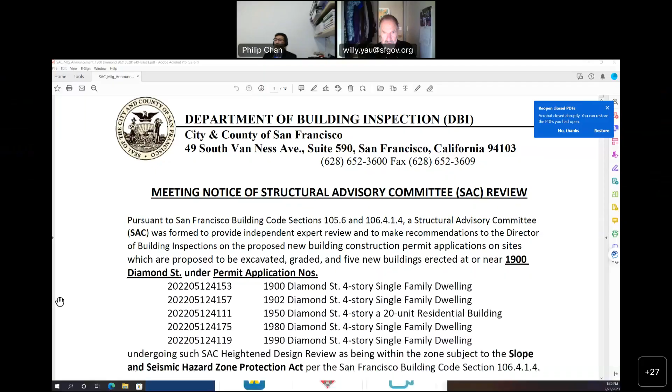SFBC 106A.4.1.4, the proposed project is subject to mandatory submittals and heightened reviews of reports by a structural advisory committee as defined by SFBC 105A.6. The proposed permit applications are proposing site excavation and grading and construction of earth retaining structures and new residential

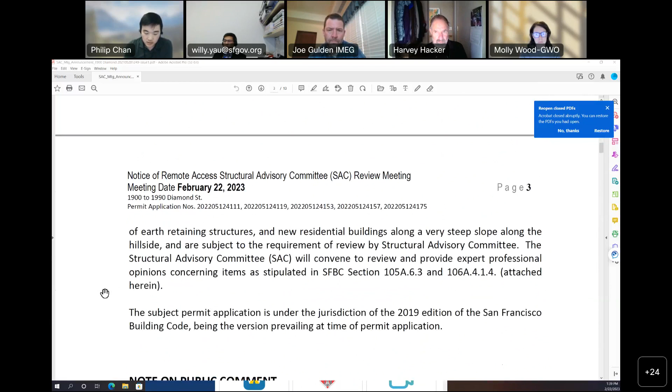buildings along a very steep slope along the hillside and are subject to the requirement of review of the structural advisory committee. The structural advisory committee will convene to review and provide expert professional opinions concerning items stipulated in SFBC section 105A.6.3 and 106A.4.1.4. The subject permit application is under the jurisdiction of the 2019 edition of the San Francisco Building Code,

being the version prevailing at the time.

We'll read the note to public comment. The Structural Advisory Committee will take public comment on all items appearing on the agenda at the time the item is considered by the SAC.

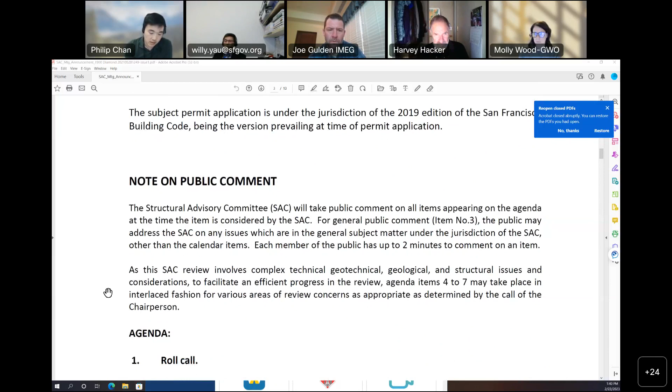For general public comment, item number 3, the public may address the SAC on any issues that are in general subject matter under the jurisdiction of the SAC, other than the calendar items. Each member of the public has up to 2 minutes to comment on an item.

As a SAC review involves complex technical, geotechnical, geological and structural issues and considerations, to facilitate efficient progress in the review, agenda items 4 to 7 may take place in interlaced fashion, or for various areas of review concerns, as appropriate as determined by the call of the chairperson.

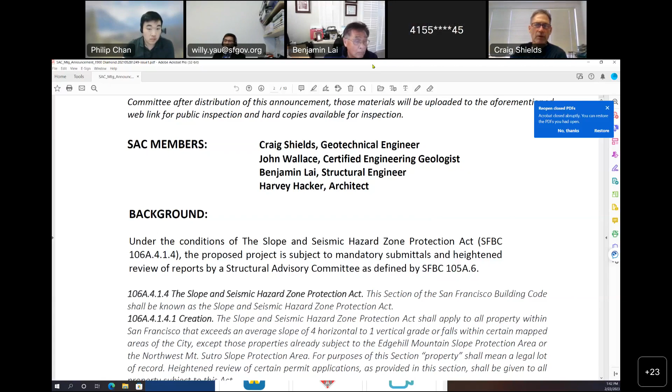John, you unmute yourself. What are you apologizing for? Crumbs? Oh, come on.

We're having trouble. Let's see. John, you calling in? Might be having some difficulty. I saw him on video. He was here earlier. Yeah. Okay. Let's give him a minute.

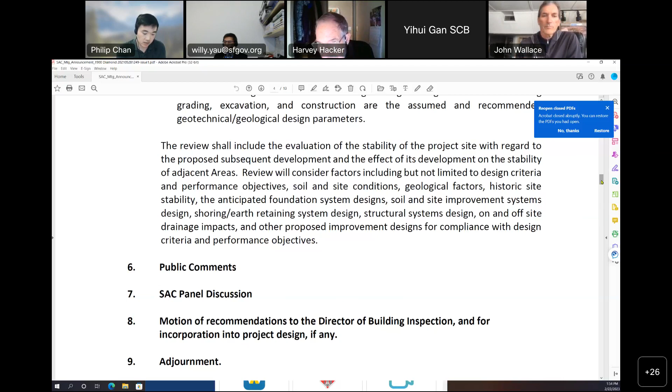Item number 5, we'd like to throw it into the project team's hands and maybe get a quick overview from the architect on the general scope of the project. Then the architect can hand it over, probably going geology, geotech, structural, and shoring in that order. Let your team weigh in on any items in their area of expertise that would help summarize the project for everybody. Along the way, after each respective area of expertise is addressed, there will be action items called out, and those are critical that they get documented in the minutes. So we'll try to be very clear on the action items, things that will require future addressing by the team, and raise those during each area of expertise commentary.

And I guess now would be the best time. I'll go ahead and read into the record the documents that have been provided by the project team for the Structural Advisory Committee review. Let me start. So in my file, I've got a geologic hazard and geotechnical evaluation report prepared by Langan Engineering and Environmental Services, dated July 31st, 2020.

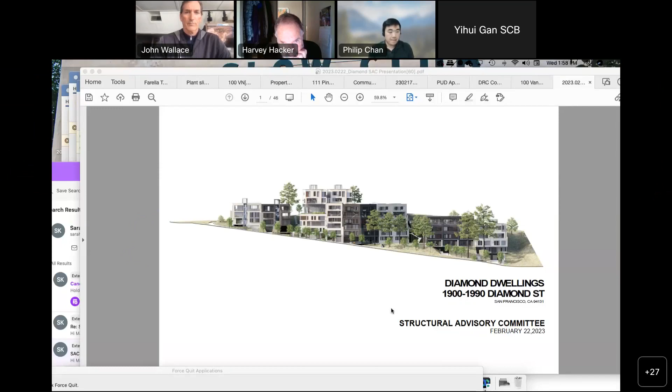So we already did the introductions, but again, these are just the team members: Langan, Geotech and Geological, Irwin and Granite for shoring design, IMEG structural, BKF civil, Groundworks landscape, SED architecture. Civil, landscape, and architecture don't have a presentation part, but they're available to answer any questions and engage in dialogue.

So I think we all know the site now. It's a 3/4 acre site. It has pretty decent slopes in both directions, east-west and north-south, at the corner of Diamond Heights Boulevard and Diamond Street. It's never been developed in its history. Currently it has about 30 trees, mostly Monterey cypress.

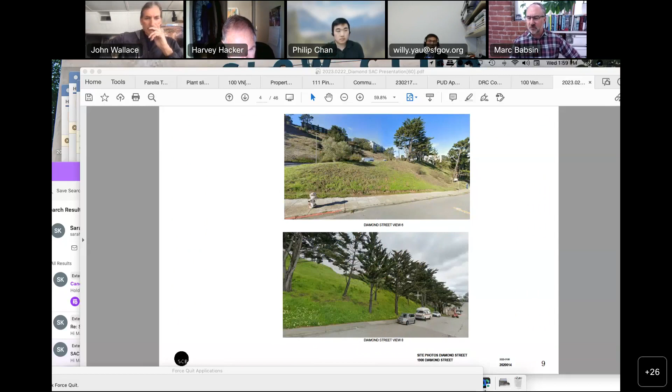Through extensive community engagement, we ended up preserving 10 of the trees. So it's kind of a non-traditional plan. You can see that these duplexes are pushed off of Diamond Street, which makes for a non-traditional development.

But there's a bunch of different building types, as you'll see in a second. I think we call it 5 buildings, maybe 6, that range from all wood, all the way over to the left, single-family homes, to an all-concrete building to the right of that, and then a couple of 4 stories of wood over 1 of concrete. In the back, the 5-story building is 2 stories of wood over 3 of concrete. That's their garage and lobby with townhouses above.

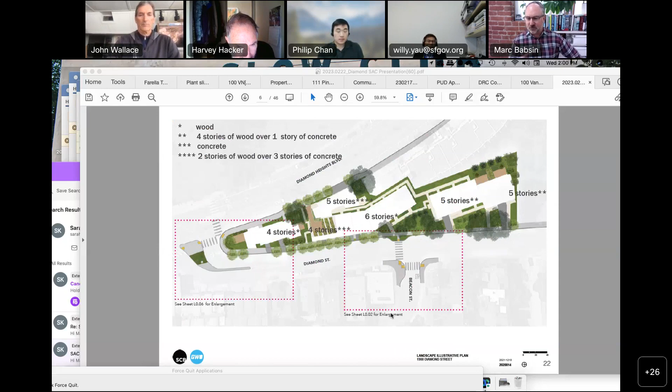Structure, we'll get into this, but this is kind of just again a lay of the land. These are just pictures, so you can have visuals of what it looks like before we get into the technical stuff. This is on the north side of this site.

This is Diamond at 29th. Those are the cypress that exist and will remain. Behind that, over to the right, you see the single-family homes, and then duplexes 7, 8, and 9.

This is kind of midway on Diamond Street where Beacon hits, and you get to see a few things here. Starting on the left, it's duplexes 2 through 6. Above that are the 2 townhomes that are on top of the garage, where you can actually see one of them there. And then on the right, after the green break, is duplex 7, 8, and 9.

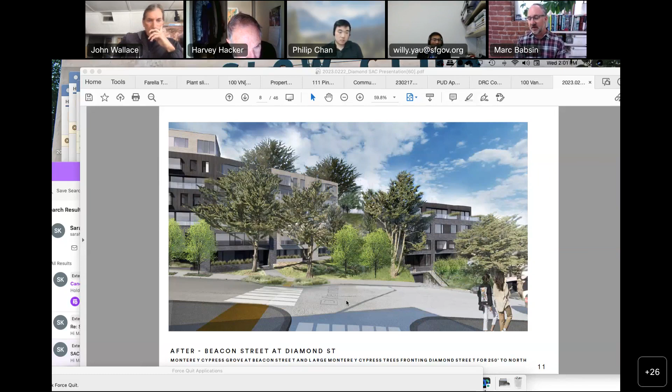This is still on Diamond Street. This is duplexes 1, 2, 3. You see a little bit of 4 and 5 off to the right, and looming above that is the top of the garage building, the top duplex there. We've got a public stairway on the left there, and you can even see people above the 4th floor. That's a public deck.

And then when you're up on Diamond Heights Boulevard, it's much smaller. Starting from the left or the north, you've got that garage building with a garage structure and then 2 units above. You also have your lobby there. Then a break where the stairwell is, and then 2 single-family homes. And then it's someone's yard on the right.

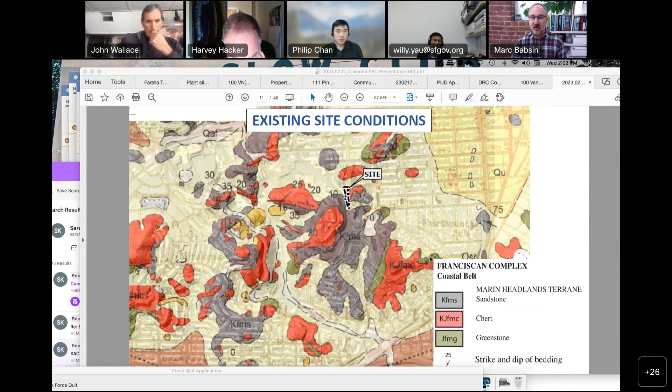All right, well greetings, I am Josh Goodman. Just as a reminder, I am a senior project geologist with Langan. I'm a certified engineering geologist as well as a professional geologist in California. Just to give you the overview or the roadmap of where I'll go with my part of this topic, I'm going to start by giving some contextual information.

So I'll share what we were able to glean from the surface, from public literature. Then we'll look at the subsurface. I'll summarize the subsurface information, and then I will loop back and discuss some of the slope stability settings.

So what we're looking at here is a published regional map by Schlocker. Our site here is in this sea of what he's mapped as ravine deposits, the superficial units. You can see that it's surrounded by bedrock of the Franciscan complex, including sandstone, chert and shale. I'll also point out there's some greenstone mapped nearby, and I'll come back to that when we talk about some of the subsurface data that we collected.

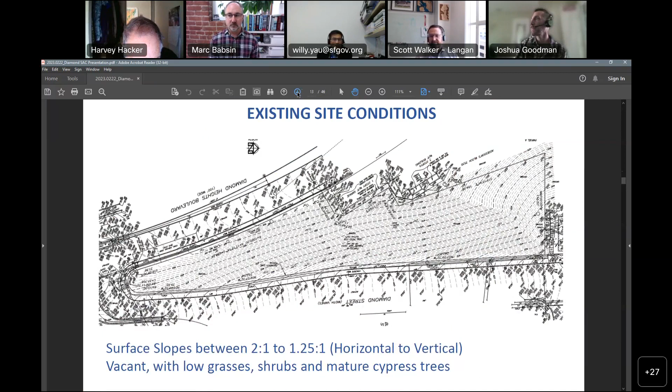Here's our site plan. Our subsurface exploration program consisted of looking at 2 main types of data. One comes from test pits, shown by the black and white checkers. We've got what we're calling trenches down here, excavations about 3 to 4 feet deep, made for some of the landscaping that was done. We went in and logged those as well. And then, through our subcontractor, we collected 2 seismic refraction profiles, shown as A and B here.

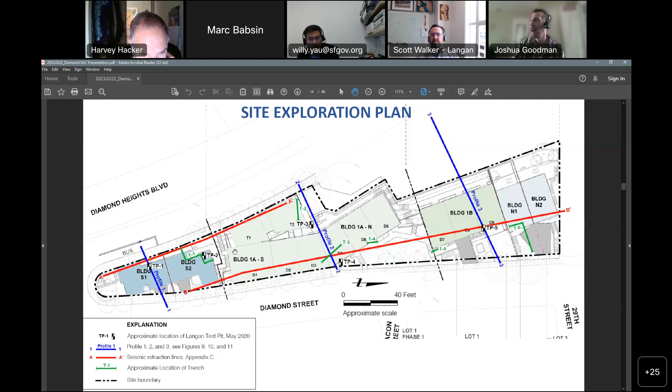What I'd like to do now is just at a very high level share some of the findings from the subsurface information. We'll look at this cross-section profile 2 and profile 3, which go through the highest slopes on the site. And then we'll come back and look at the seismic refraction data.

This is just an example of our test pit log here, with 2 feet for scale. In contrast to what I was showing you with that Schlocker map, the regional map, with one exception—our test pit at the south end—everything else was essentially all in bedrock with a thin veneer of topsoil. Our southernmost test pit, we did find about 18 inches to 2 feet of what looked like a surficial deposit that could be consistent with colluvium or those ravine deposits by Schlocker.

But again, we are mostly in bedrock, and the rock we were able to identify included chert, shale, and sandstone. This is a key point with respect to slope stability: both the bedding as well as some of the joints or fractures consistently dip into the slope. Here's a representative photo of what we were finding in our test pits—you can see this blocky bedrock material, this is the spoils pile here, and you can see these lines or stripes crossing the excavation. That's the stratigraphic layering, and it's inclined into the slope.

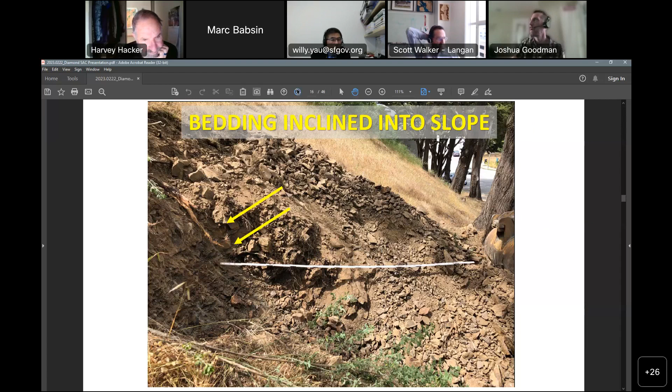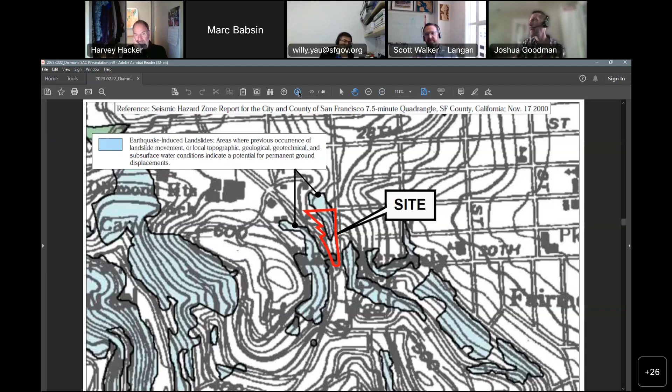Regarding the geological conditions, it's possible that based on the Schlocker map there were surficial deposits, but while we didn't encounter them, or only encountered them in a very limited spot, it's likely that if those things were there, they may have been removed during grading of Diamond Street or Diamond Heights Boulevard. But in general, we don't have those conditions here, and again, shallow bedrock.

North of our site, there was a series of slope failures that impacted some of the nearby properties, associated with the Vista Del Monte apartment buildings. Reading and reviewing the reports, our conclusion was that yes, these landslides occurred near the site, but the conditions that led to those landslides were very different from the bedrock we had at our site.

Specifically, they documented between about 10 to 17 feet of fill soils over a claystone bedrock, and the conclusion was that the failures were happening along that interface of rock and soil, which we don't have. There was also a natural spring present, but no groundwater was encountered at our site during our investigations. There were also other anthropogenic factors that may have contributed, including the presence of a retaining wall and other water conveyance features.

So that is all I have, and I will now pass the baton on to my colleague, Scott Walker.

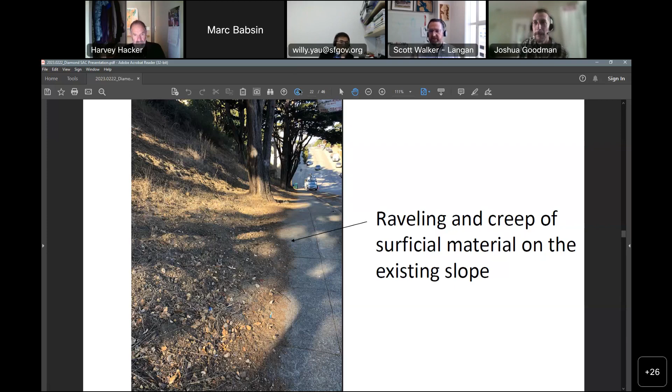Again, I'm Scott Walker with Langan, a geotechnical engineer in the state of California. We've worked on this project in conjunction with Richard Rogers, who has a lot more experience than I do, which is a great resource to have.

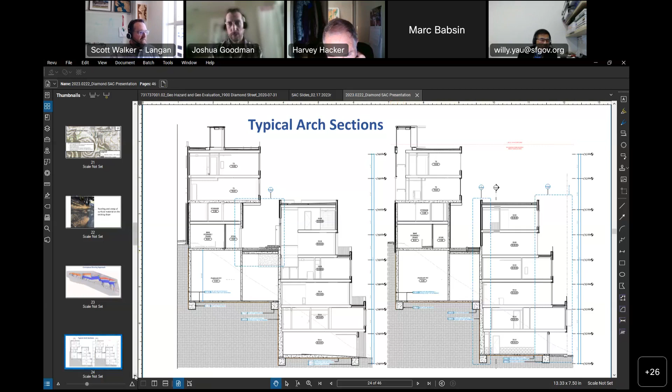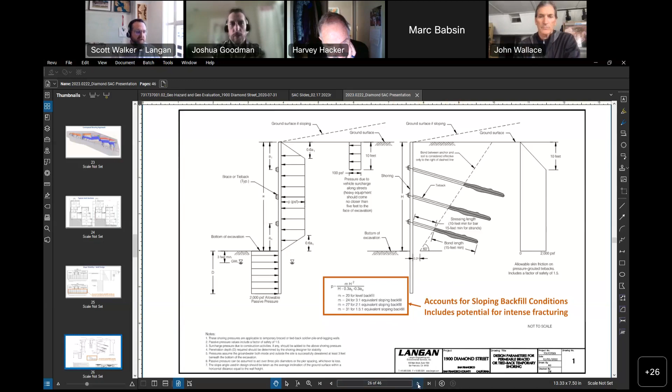The document that this figure is from was actually a supplemental document as well. It was not listed, John, in your list. I'm not sure if you guys have it. If you don't, we certainly can provide it, and that can be a comment we close by providing. We believe it was included in the package that was sent. Yeah, I haven't seen this particular one. Okay, thank you for that clarification. Yeah, I think it's in the slopes or shoring letter. We had two supplemental letters, right? One was micropiles and one was shoring. That's correct, those are the two.

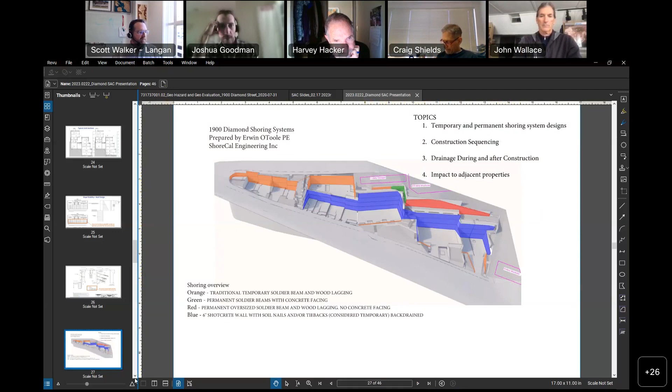And here we're coming back to this 3D view just to get an overall approach to the various shoring. Erwin O'Toole is going to pick it up from here and talk in detail about the various shoring activities. But again, we can see we do have some of the improvements. So the buildings that are nearby, we have the one-story garages, 2 to 3 story structures that are kind of embedded into the hill slope a little bit, and then a 4-story structure down here on these sides. All 3 of these are supported by the various shoring systems as planned. I think, Erwin, I'm going to pass it on to you.

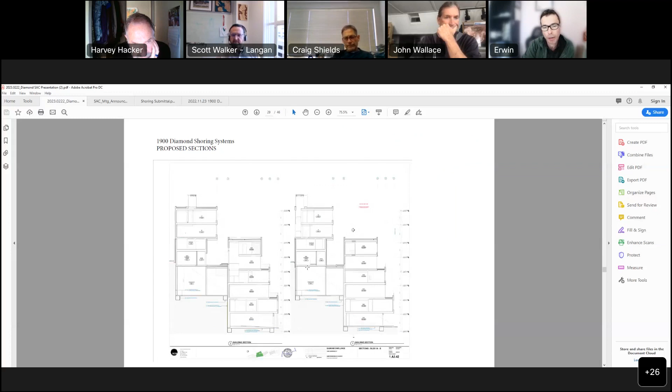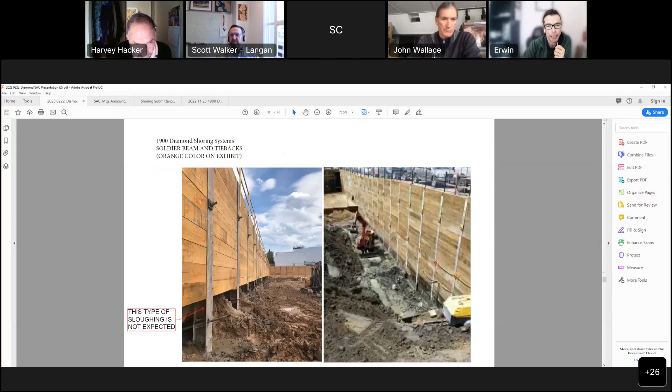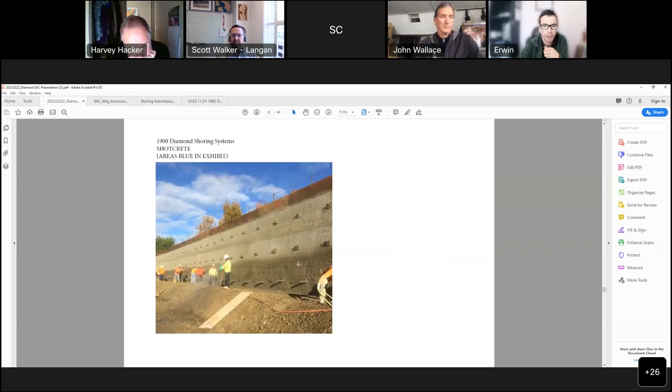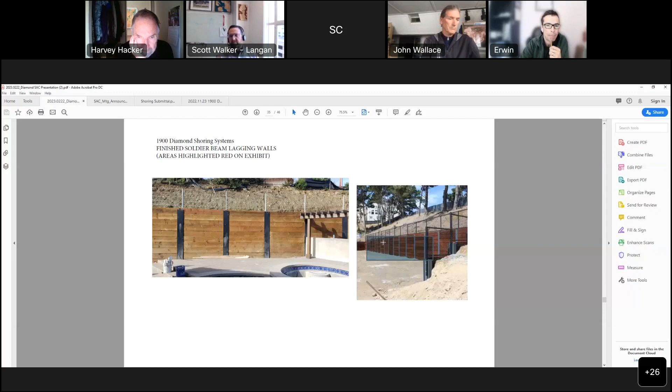And in green, we have the area where we have soldier beams and then a shotcrete facing.

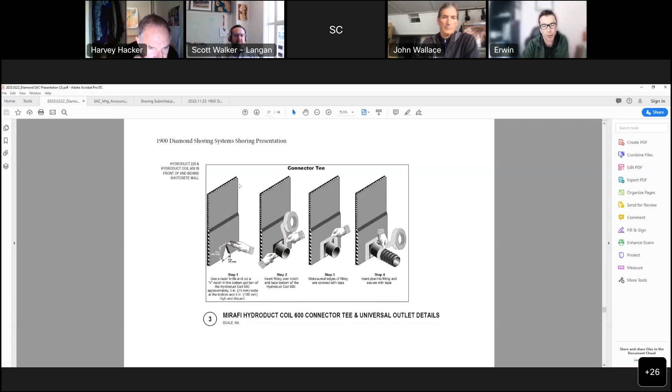Next, we're looking at some of the traditional drainage techniques for the temporary condition behind the walls. This mirafi-type product actually gets put in place in two locations: one, behind the shotcrete lagging or the shotcrete soil nail wall, and also, as part of the waterproofing system, in front of it to ensure adequate drainage. That location is here, and where there's shotcrete, it's here and here.

One of the items that I take on board is the temporary and permanent shoring design, which uses the geotechnical parameters reviewed by the team, and the construction sequencing, which I should speak to a little because I'm not sure how well this will present, but it's a 6-page document within the 16-page shoring plan.

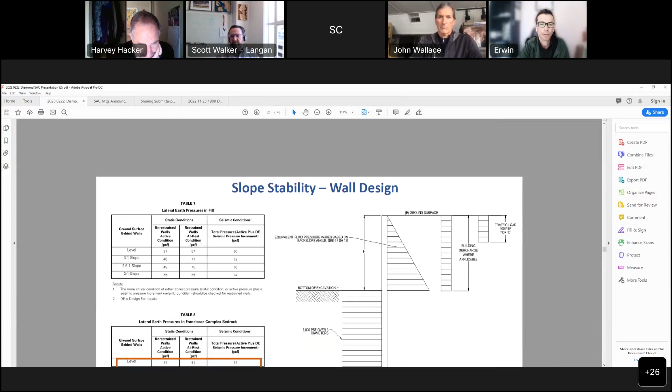What it tries to do is show the team each stage of how we build the project from the top. A better way to present this is to go back to this image right here and just talk through it. It's presented in the construction document.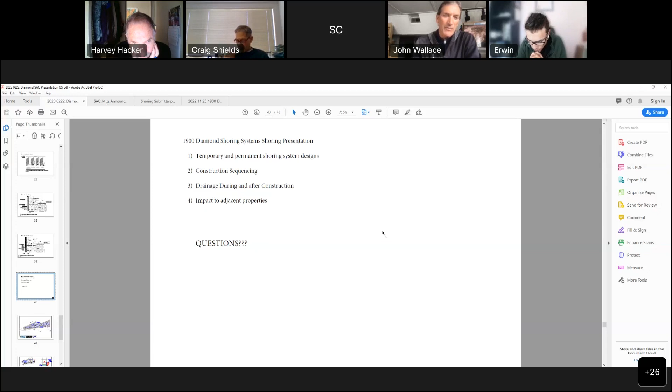And I tried to access the portal for the documents several times and wasn't allowed to re-access it. So that's why I was wondering if there were other documents out there that had been updated since the ones we received initially. I'm wondering if this is going to lead to a lot of your questions and comments being on an earlier version. That was not a complete set that it sounds like you reviewed. Is that true for the other groups or just for shoring?

Craig and Ben probably spend a lot more time on the shoring than I do, but I certainly had a lot of questions because the couple of things Erwin presented were things I had questions on, for sure on back drainage, because none of that was illustrated on the first set.

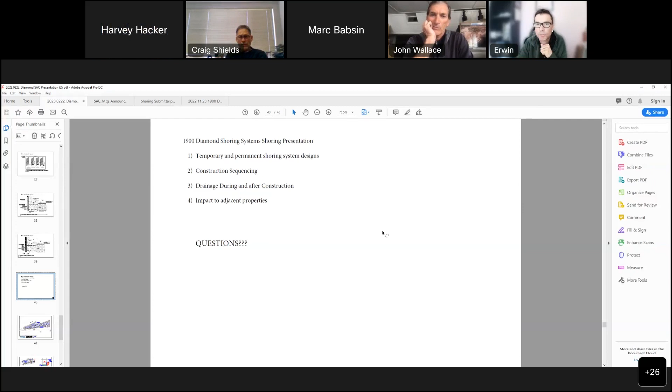Trying to make the most of this time with all the notice. Maybe everyone could stop the share so we can see each other for a second. Erwin, are you able to walk everyone through your plans? Yes. Does that make sense, or do we just stop this meeting and reschedule it for a month from now? It's okay, thanks for calling, Wilson.

I think walking through the plans would be good for now. What do you think, John? Maybe finish the presentation, and then when we go through each respective area of expertise more closely, we can dive into the nuts and bolts and start with our questions on the shoring, and Erwin can walk us through it at that time.

I think what the process was supposed to be was we gave you a progress set to do the bidding, and then there was supposed to be a review based on the final set. But sounds like something was lost in transition there. So rest assured the drawings were completed, but I think that sounds like a good approach, John.

I think we just have IMEG left. Did you have anything else, Erwin, from your presentation? No, thank you. Okay.

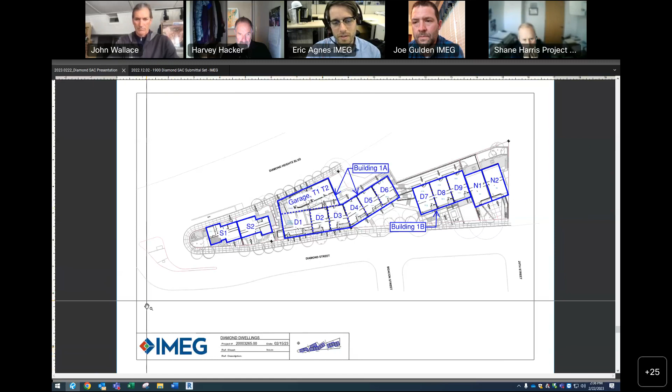So starting off here with S1 and S2, we have a cantilevered retaining wall structure for this building. It's very common within the residential industry, especially where you have wood frame structures that aren't able to support your retaining wall, so you have to typically design it as a cantilevered retaining wall. This means the foundation alone is resisting that overturning force from the retaining wall itself.

We can see here that in section 1, we'll start off with just our loading. We got our typical triangle distributed retaining earth load. At this location, we also do have a traffic surcharge because we have the street that is close enough to impose that load, and then we also have our seismic loads as well.

So all 3 of these interact to create sliding force. Now, how that force is resisted is two ways for this building. We have our friction force, which is the interaction between the bottom face of the footing and the soil itself - that friction can resist the movement. And then you also have the passive pressure, which is the vertical face of the footing being pushed against the soil itself.

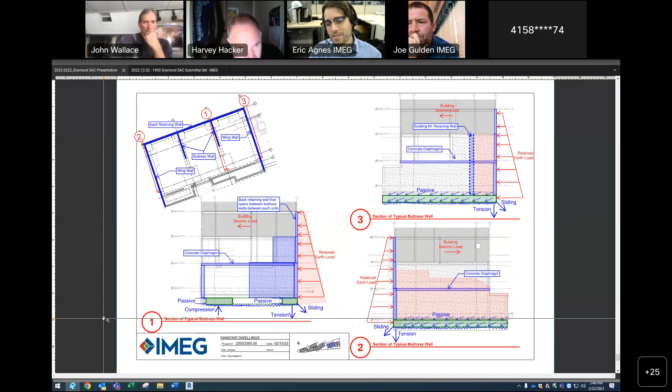Moving on, we have building 1B. This is a very similar structure to what we saw before, just slightly smaller. We again have the same buttress and wing wall system and back retaining wall system. We're utilizing the same methods as far as sliding is concerned: passive pressure, the coefficient of friction, and tie downs at this location. Again there's the same TC couple as before.

That's the design. We could take a look at the wing wall for this. It's slightly different; we do have one level of concrete, which allows the wing walls to span vertically and cantilever past that diaphragm to catch that little bit of soil above. As far as sliding is concerned for the wing walls, we're again utilizing passive pressure.

Section 3 shows the wing wall on the right-hand side of the building. This wing wall isn't taking a lot of load because we have an adjacent structure next to it, building N1. This red section you see is the only soil that's pushed up against this wing wall, so we're seeing pretty light loads there.

Moving on to N1 and N2. Again, it's very similar to what we saw before. We have the typical buttress wall and wing wall system and the back wall. One thing to note, this is just a buttress wall on this side, not a wing wall, because there's the unit D9 there, so there's no soil pushed up against it. It's just used to transfer load from the back retaining wall to the buttress wall.

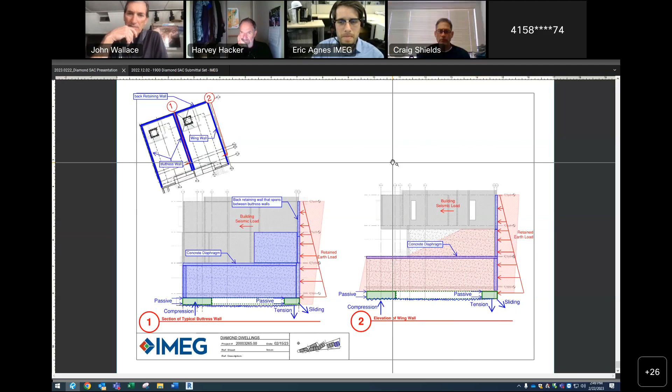Am I the only one that didn't? Ben or Craig, did you guys have any updated? No, I just got the ones that I got originally. I didn't see any emails with new drawings attached.

I went back through the emails. They were there. Everyone was on them, right? December 2nd, 3rd, 4th - all this discussion about the new drawings being completed, and Tom sent another link. We all were on there. It's kind of upsetting.

Sent to Willie on December 5th, and everybody is on there saying that they're available through the Dropbox link, announcing that the new drawings are ready the next day. I wish if people hadn't been able to access them, they would have notified us. That's disturbing.

So Marc, you're saying that they were made available to everybody? Yeah, we're all on the emails. December 5th, Tom sent one to Willie saying what files they were in, and they were available through the Dropbox link originally provided. There's an email with the Dropbox link from Willie on December 5th, and then there's some requests for updated calculations from shoring from Benjamin on the 5th, and then Willie asked me, and we provided a link.

There's an email from Willie talking about how we're going to submit on the 2nd. I mean, lots of dialogue about it. You guys reviewed what you reviewed, but it's disappointing.

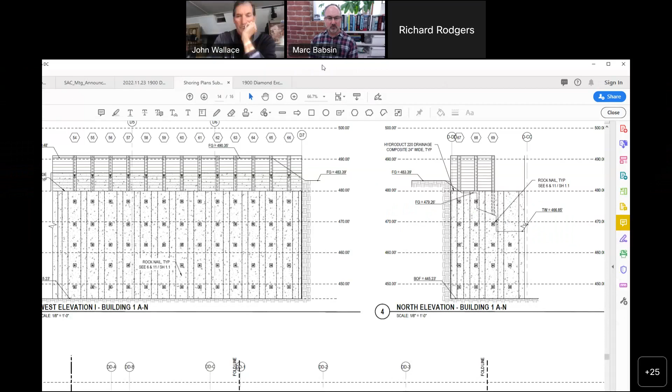And I guess if you call out your elevation on the rock bolting, then everybody knows it's 5 feet or 6 feet or 10 feet, whatever, right? But since you didn't call anything out, nobody knows exactly what the spacing is between the rock nails. Happy to elaborate on that. Typically, when we record these, we record them at the elevation and the location.

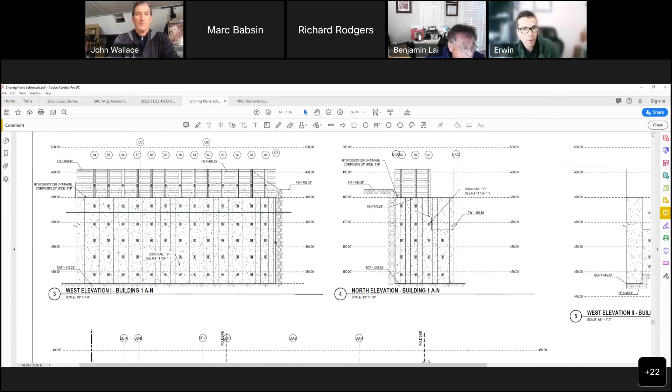So, for instance, on this elevation here, which is one of the principal elevations, what we have is the drainage panel shown there. And then these would be installed per the notes at that elevation, which is less than 6 feet. What I wanted to do with these was try to give a little bit of flexibility, so we have a callout here that shows the maximum and minimum for this work. Let me just look through these 16 pages and get it to you.

So this was the updated set that calls out those maximum and minimum. You say this is again 8 feet on center max? Beg your pardon? On the vertical dimension, if we go down to the second nail and the third nail, there is an 8 foot on center max, isn't it? Right.

Yeah, for instance, to speak specifically to the question about excavation and exposures, I chose this 3 foot max for the top, so that typically these are installed 2 feet below. So that would put us at a 5 foot exposure of dirt. And then once the nails go in, this shotcrete can get brought down more, and we can move on to the next elevation, so we can have intermediate shotcrete pours as necessary.

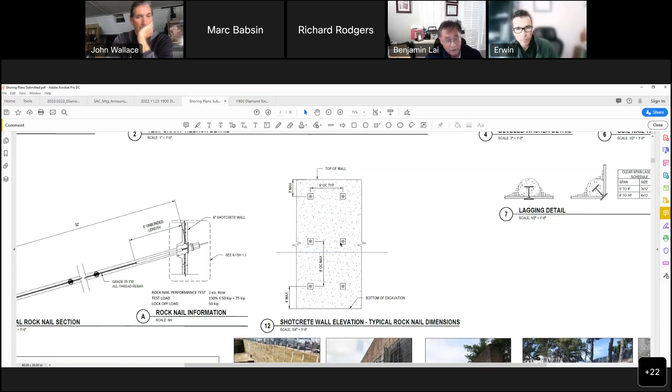Well, it's still 8 feet though, right? So you get 2 feet below the nail and then you shotcrete to whatever you excavate, the 2 feet below the nail, then your next layer gets another 8 feet max. Correct, but you can have intermediate makeup pours as necessary.

But that didn't call out your nail installation, that kind of thing. I don't know, maybe you should add that to it so that the people doing it, or the inspector doing it, know that's going to happen. Yep, absolutely.

Yeah, also on your calculation page, you show the input that shows your elevation, or so it only shows like 4.6 feet per each layer. But I don't know how this would relate to your drawing, how you get that back to your drawing saying this is 8 feet on center. How you design that compared to what you design in the calculation doesn't really match on your drawing.

Because on your calculation page, like 256 of 259, that page, it seems like you have 8 rows of nails, so every layer is a 4.6 feet difference in the spacing. But then now on your drawing, you say 8 feet max, and I don't know, adding everything up, how you match your calculation.

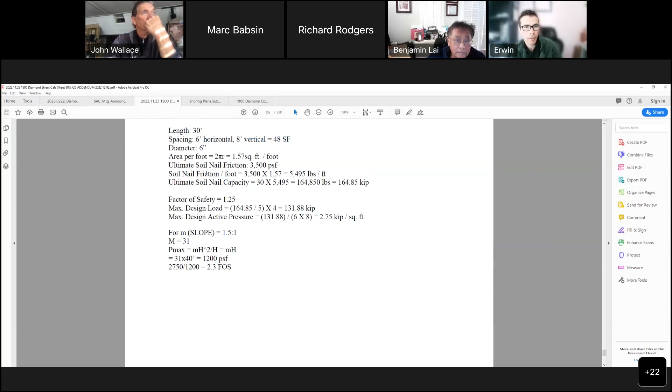I have the updated calculations here on this 259 page document, and this is the spacing there at 8 foot, 6 foot horizontal. We can go through this now or later, but the calculations match.

This elevation, this page, you see like 1, 2, 3, 4, 5 nails in here, right? Correct, yeah, for a 50 foot cut. Then you go to the next page, 256, your page 253, then page 256, a couple pages lower, then you write those numbers there. Your first row is 4 feet and the second is 4 foot 6.

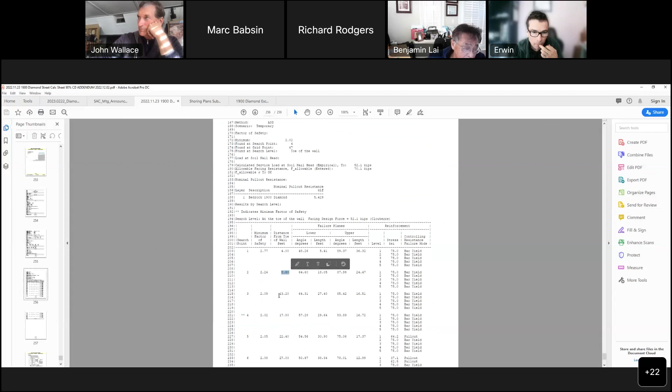And the third, you add another 4, 6, and so on and so forth. Keep going, you have 8 rows of nails in here, seems like to me. But then how can you say 8 foot maximum? I'm not quite understanding how you get to that.

Understood. We've... maybe you addressed those. Modify your calculation or something to match your drawing.

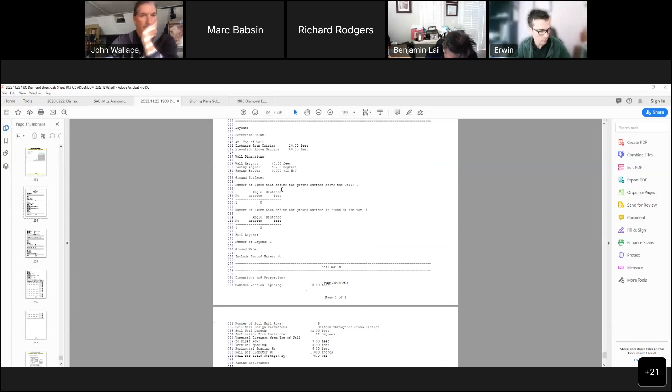Yep, we can update that.

Also, on your cantilever soldier beam design, on beam 121 to 139, I found it a little weird. Your beam 121 to 125, design height is 16 feet, 6 feet on center, you need an embedment of 10 and a half feet.

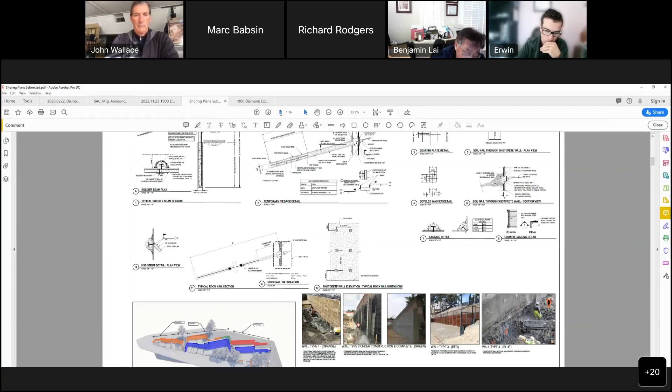But for 129 to 134, your retaining height is 20 feet, same 6 feet on center, you require 9 foot embedment, which is less than 16 feet. And also for 135 to 139, you have a 27 feet retaining height cantilever beam at 6 feet on center, you only need 15.5 feet embedment.

Doesn't seem really right on the geometry because you're 27 feet high, then you have like half of the retaining height as embedment for the soldier beam. I guess you might want to double check your calculation, because for 16 feet and 20 feet, your embedment would be worse.

Not sure which location we're talking about here. Well, that's on page 17 of your calculation, your chart. Your beam 121 through 125, you have a 16 feet retaining height, and then you need 10-foot-6 embedment.

121 to 125, yeah, right here, 10-foot-6, right there. But then the 129 to 134, you need 9-foot embedment, which is a 20-foot retaining height. How can that be? Seems like that doesn't really make much sense.

Oh, thanks for that. And also the one below, 135 to 137, 139, you have a 27-foot retaining height, and you get 15.5 feet embedment. It doesn't really seem right on the geometry—27 feet high, that high, then the embedment so shallow.

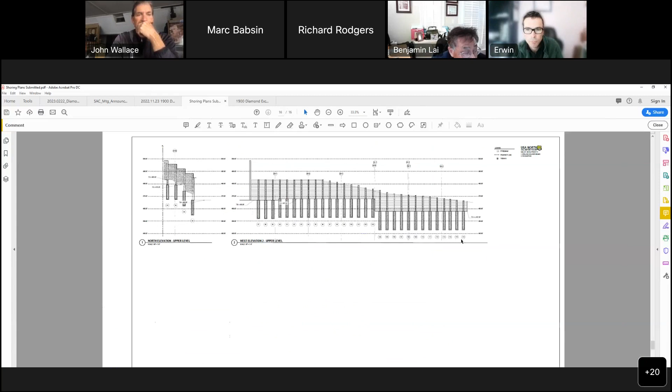I guess you want to double check that, because normally you want at least a 1-to-1, or 1.1 to 1.2, embedment ratio for the soldier beam, for the cantilever.

Yeah, we're gonna get back to you on that one. Yeah, you want to double check on that.

And also in your calculation of the soldier beam, you allow for 3 times the geopier diameter for the passive resistance. Your geopier is 2.2 feet diameter, and you use 3 times. But because you're only 6 feet on center, you probably cannot use 3 times on that passive. No, it still reduces to only a 6-foot spacing anyway.

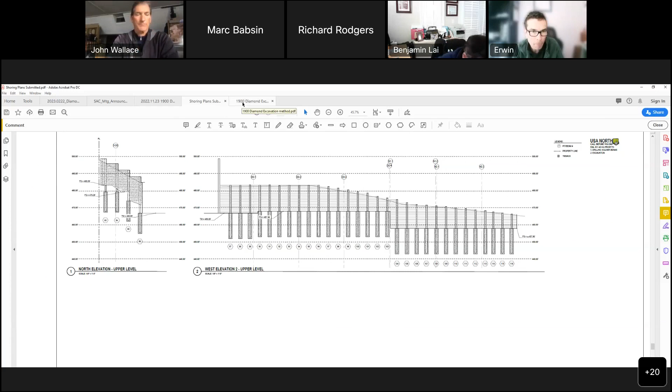I guess that's one major part of my comment, and I think you probably need to double check your calculation, and do some more work on the elevation so that you show all the rock nail numbers and the layers, what the row elevation is, so that people know what needs to be done over there.

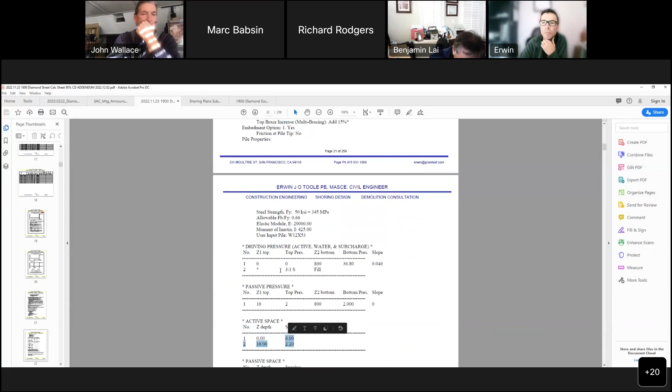Great. Okay. I have a little comment here, Ben. Yeah. And also Sir Erwin.

Regarding the oversized soldier piles that are exposed to weathering, isn't it that the recommendation should come from checking the corrosivity of the soil or rocks, and providing that recommendation from a geotechnical engineer?

Well, I guess that makes sense, but before we did all our projects, if it's permanent, then you need a coating, unless you get 3-inch concrete cover. But I don't know now, maybe the new code changed that, maybe you don't require that, I don't know.

Because it didn't explain on the calculation or the drawing—it just says oversized, but I don't know what's the definition for the oversized. You don't need coating or galvanized protection for the soldier beam.

In terms of corrosion on other projects with foundation piles made of steel, we do retain a corrosion consultant, usually retained on the project, and they can provide guidance on what kind of cover would be required for a given design life. Usually it's something like 1/8 of an inch on any given side for a 50-year life.

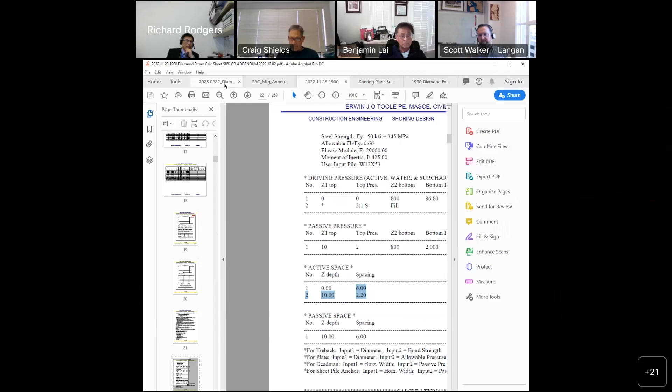You have cleanouts. One of the questions we have, Willy, is do we need sand traps for every unit, or can we get them all together and then put in a sand trap before, and use a limited number?

The sand trap, before you go into the city sewer, you need a sand trap. No, but do we need one for every unit, or can we have one for a combined number of units?

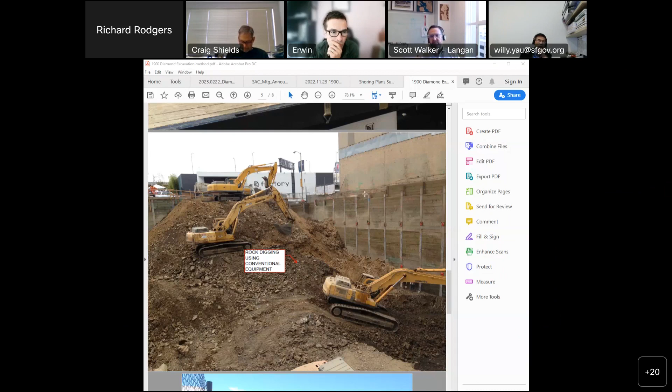I've run into this, that's exactly what I said, is that if your drainage is going through only one outlet into the city sewer, that's where this connection is. If you connect directly to city sewers, whatever the direct connections need to get a sand trap.

Yeah, it looks like the cleanouts are kind of spaced far apart, except for maybe one at the end there where they can connect up on the north side. But the other ones are kind of spaced far apart to connect them before you go to the storm drain. Hi, this is Christine Gurske with BKF Engineers.

We have another utility plan too, and we've coordinated these drainage lines, and we have inlets at those solid combined pipes that incorporate sand traps. So anywhere there's a lateral to the street, we would provide a sand trap via a drain inlet, just city standard detail style.

And the subdrain ought to have, in key locations, reasonable length to have cleanouts. But this retaining wall is pretty tall.

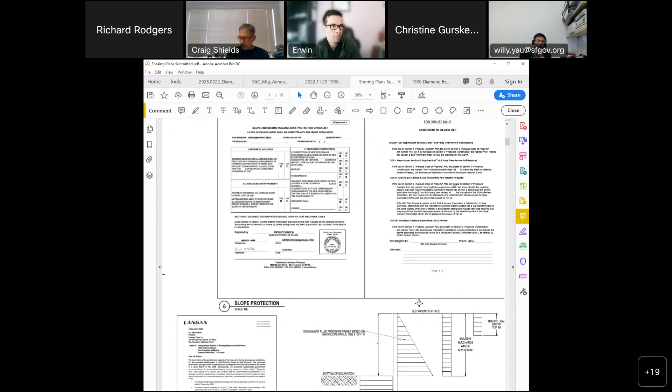So the second question I had was regarding whether the lateral pressure diagrams shown in Erwin's drawing, from his demonstration for the cross sections with those cascading walls, adequately address the real pressure on them. There were some color exhibits brought in during his presentation, and that's on the structural drawings there.

What we're talking about is having a retained cantilever wall that's set back from the wall. Cascading, actually not this one here, but the one that has a step. There you go, the cascading wall, the one on the left-hand side, there was one showing that.

There was a demonstration that shows two triangular blocks, one for the top, one for the bottom. This one does not show that.

Going back one? Yeah, I think it's probably further back. Yeah, there we go, I think it's the one with the garage. You just missed it. Go forward one. Yeah, there we go, right there.

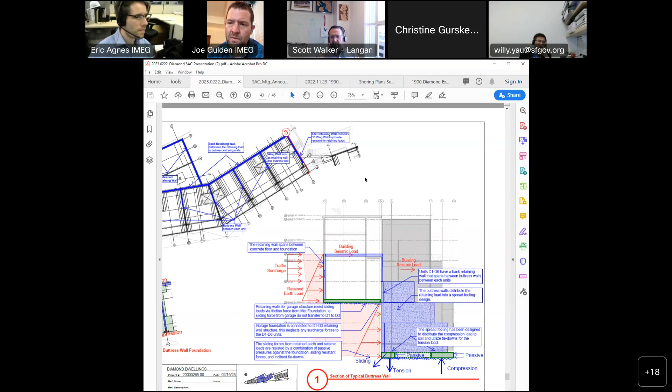So here what we have is that we've got the one wall system that's taken up by the structure, and the lateral load is dissipated within the footprint of the garage structure there. And then the vertical loads on the other side, all the columns coming down, are carried right into that wall. So we don't have surcharge pressures from the foundation itself pushing down, and so we get to start over with new pressures there that take that into account.

I think, Willy, are you talking about the soldier piles that are, is this a cantilever soldier pile wall behind here, the one in the upper part? Actually, it's the lower part. The lower part, that is a certain load that's going through the garage slab that is going to go into the lower wall.

So all the loads close by that wall are carried into the wall itself. The structural loads come down into the combined wall that becomes the lower retaining wall. Now, the green slab right there, that's the part with lateral loads coming in from the lateral walls on the left, pushing into that slab, into the lower wall, wouldn't it be?

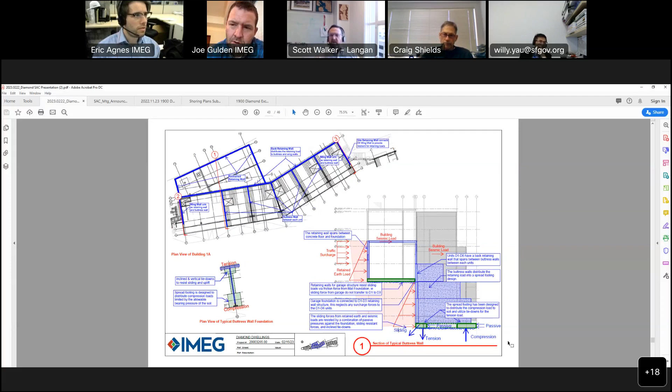Well, yeah, I think what we did is we checked the sliding, so the upper box to the upper left, the sliding resistance at the bottom of the green slab takes out the lateral resistance before that load makes it over to the other side, to the other wall.

And that friction is being resisted by the soil below, right? The rock and the soil below has to exert that load into something.

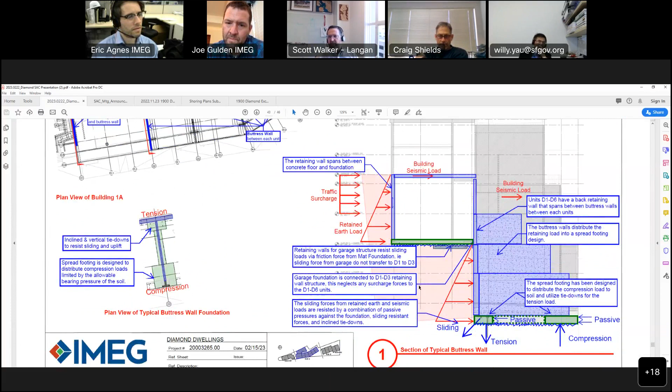So I mean, we can provide a response to that question, but because it's rock and we're able to take it out before it gets to the other side, there doesn't seem to be a mechanism to really apply a lateral load on that secondary, the lower rock wall system.

Yeah, we have to be careful here. One's friction, one's a surcharge. The friction load can be taken out in the rock as sliding resistance, versus a surcharge that's going to be imposed on the wall below. So I don't want to confuse the two, but as Scott said, we can respond to that. There's friction which is purely at the rock-slab interface, and there's surcharge that's actually a vertical load that gets translated into a horizontal load imposed on the wall, and they're really two different things.

Well, that's the heart of the question here, is that the load's got to go somewhere. If you think the rock is able to sustain itself, then you don't even really have the second triangle on the bottom, because you have a piece of solid rock standing, it can stand straight up as a cliff. But I just want to be clear that the frictional load is not necessarily a load on the lower retaining wall.

When it's soil and when it's rock, it would be different. The rock can stand as a cliff, if it is of that integrity, so to speak. So I think we have fractured rock there, which is a different story, isn't it?

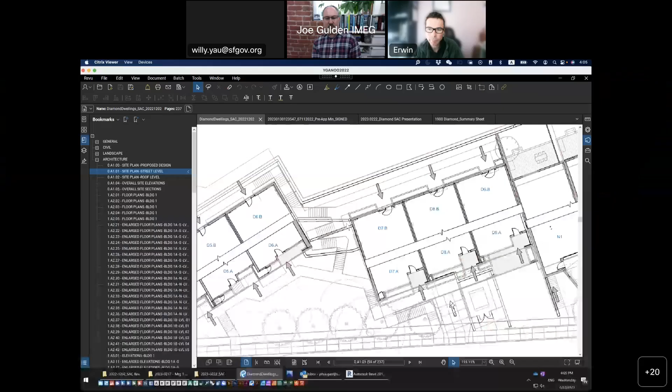At the top of 1B there, that's just a walkway for the set where it's D7B, 8B, 9B. Yeah, so right above there, that's just a walkway, so it's not actually a stairway - you can get off the stairway and go there. Now, that stairway is on the low side of the cut, right? It's not on top of the cut.

Yeah, the stairway as it comes up from the south, then it zigzags, and that's an elevated structure that's built up with a pier, and it's supported. The foundation of that is supported at the bottom of the cut, and then as it's an elevated section, as it goes up, it crosses a line. Trying to figure out how I can draw here, but it crosses a line - yeah, right there, exactly. So as it crosses there, then it turns into a slab on grade. Essentially, it's just on the surface profile above that retaining wall. But everything to the south of that pink line is founded at the base of the cut.

Okay, is there a cascading retaining wall here for landscaping below the stair? Oh, it's a continuous cut. You see a couple of lines in here, right? Below the red, you have a couple more walls in there. Yeah, I think that there are some - it's a little confusing there, but currently there's no landscape in there.

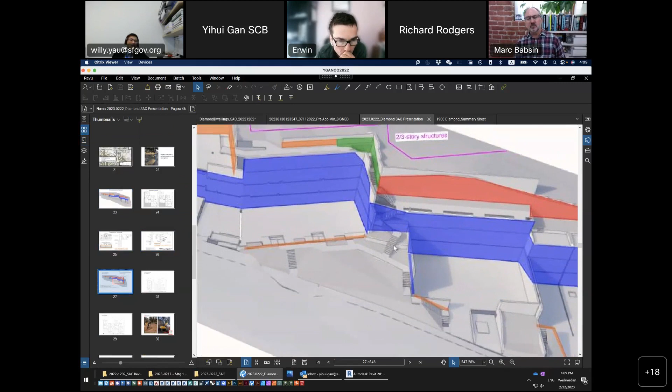Philip is going to take a look at those during plan check, as those are post-installed retaining walls. Yeah, no problem, I'll flag it.

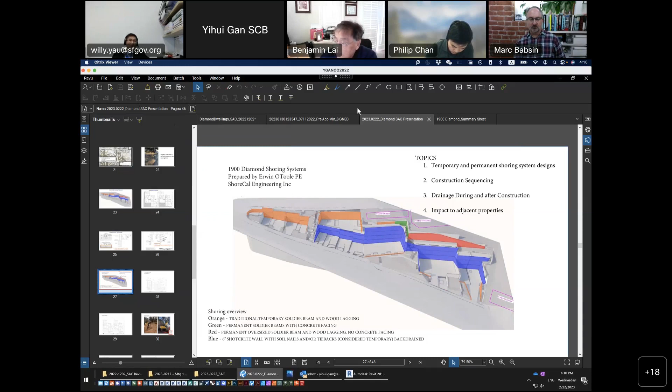Can I just ask? I'm a total layperson here. Did everyone - I don't know if it's Erwin or Yihui - need to follow all those things that are asked for? It sounded like Ben and Erwin had a thing going on where Ben was suggesting things and Erwin was getting amended. Are we clear on what the next steps are for the design team in terms of responding to things and clarifying things?

Yeah, at the end of the discussion, I always wrap up the action items and make sure that all parties are clear on what's being asked for. And in this case, we always try to end the meeting with a discussion on whether or not we need another full SAC review to go back over the action items.

And we should have a discussion amongst the SAC members about that, and Willy and Philip especially, since the plans - we all didn't review the same revision dates. What I'm seeing is not a lot of fatal flaws as far as large technical issues that could throw a big wrench into things. Correct me if I'm wrong, Ben or Craig.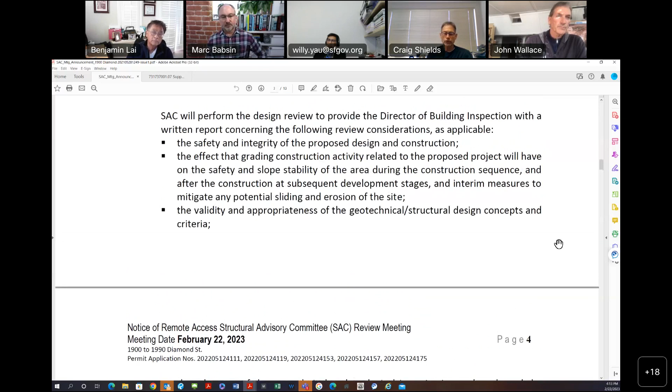Yeah, this is Craig. I don't think we need another SAC meeting. I mean, typically for these reviews, the comments from each reviewer are provided and get responded to. We could have a meeting internally after we get a chance to dig through these. I looked through Erwin's drawings, the shoring drawings, and the sequence drawings are very helpful in how it's going to be constructed.

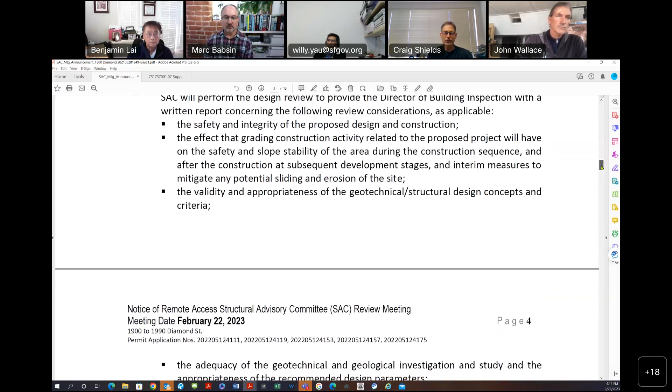So I think that's pretty clear that we won't have to dig into those a lot more. But it seems like the biggest comments are from sort of the details of the calculations of the shoring, which seems like those need to be addressed. I don't know if Ben needs to prepare a memo with all those or how that is.

I mean, normally you want them in writing rather than trying to get it in a meeting. I can prepare a summary, whatever, submit to the city or DBI or Willy or Philip, and then so that they can distribute to the design team. Does that work that way, or?

I have minor ones I could provide. Get everything, review these, and get it to the SAC, to DBI within a week - I don't know what Ben's time is, but it seems like do that. I already wrote down something, but then I can submit a summary, whatever the item is, to DBI, and so they can decide how they want to distribute it to the design team to follow up. I can do that in a week or so.

This is Willy, and I just want to remind the SAC members - I think the important thing here is that the items on our agenda have basically been satisfied. Then the others are small details regarding the project documents.

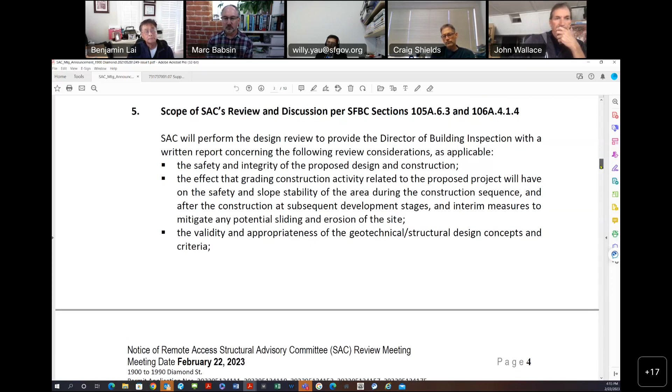That one's Philip can actually follow up on and have those things buttoned up. And actually, with the latest design drawings, if we provide the particulars, I think all the information has been discussed on this, and provided the applicants actually have a revision that basically satisfies the comments to resolve them, I think we might be good.

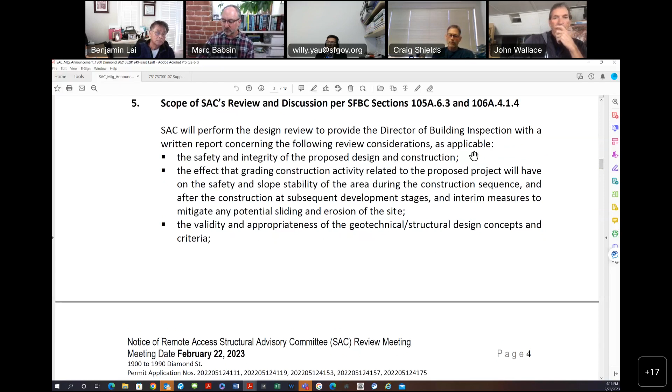But this important piece here is, well, let's go through the items to see if what you see so far with the design is in general compliance with the particular items that has been listed here.

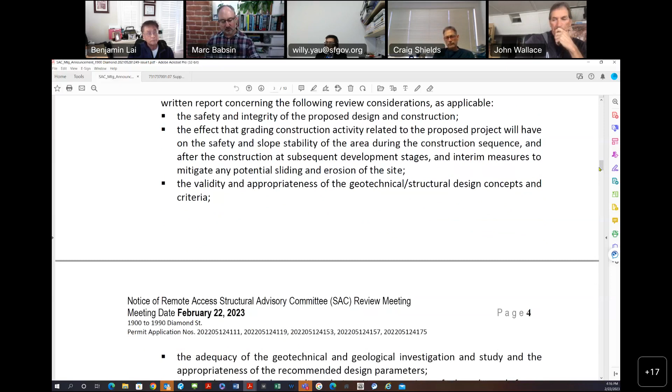So just a reminder on that one here, if the safety integrity of proposed design constructions is good, and if the grading construction activities that have been proposed would have any safety and slope stability issues during the construction sequence, and also after construction.

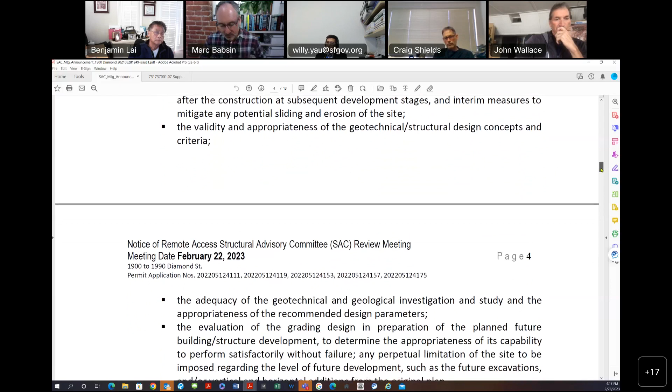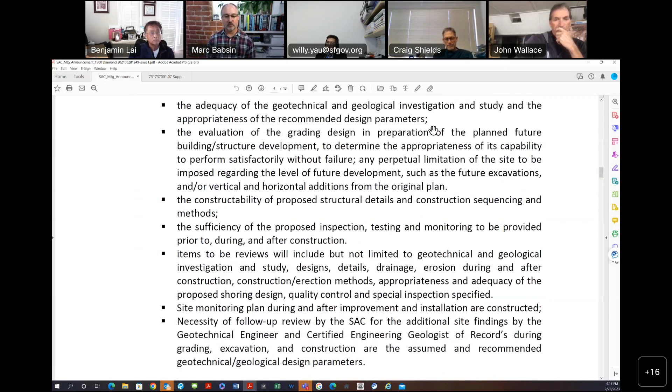And if there's an interim measure that is going to mitigate any potential sliding erosion of the site, if that has been addressed. Also important is the validity and appropriateness of the geotechnical and structural design concept and criteria that has been put forward, and whether it's adequate. And the adequacy of the geotechnical and geological investigation and study to reach the recommended design parameters—are those adequate?

And also the evaluation of the grading design in this particular planning for future structures and developments, and whether that will determine the appropriateness of the capacity to perform satisfactorily without failure, and any perpetual limitations on the site to impose regarding the level of future development, such as future excavations and vertical or horizontal additions from the original plan.

Now, this part here we have not discussed, but that's something the SAC should address in their findings. Constructability of the proposed structural detail and construction sequence and methods—looks like that has been discussed and presented. And also the sufficiency of proposed inspection, testing, and monitoring to be provided prior to, during, and after construction.

There's some monitoring of the vibrations discussed, and other than that, I do not see any other discussions regarding the testing. We did talk about some testing on the soil nail, but that documentation has to be provided.

Now, items to be reviewed include, but are not limited to, geotechnical and geological investigation, study, design, detailed drainage, erosion during and after construction, construction erection methods, appropriateness, adequacy of proposed shoring design, quality control, and special inspection specified.

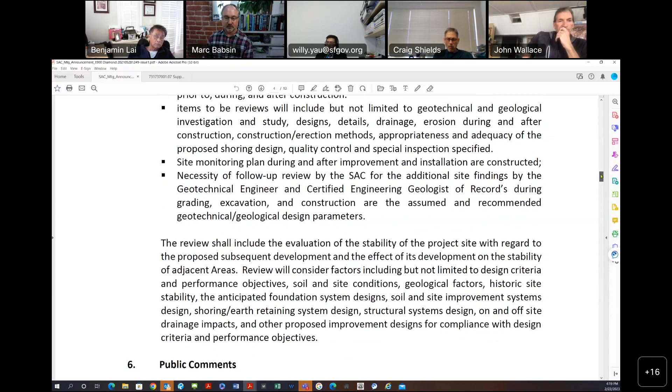Now, those things I did not hear any comments on. However, that is part of the consideration. If any part of those you consider missing in the revised drawings, then we may determine whether that has been done or not, and you might have considerations of hinging some of that if it's not satisfactorily provided after looking at the revised drawing.

We might have additional discussions, but that determination has to come afterwards. In essence, we can always have the capacity to ask the design team to come back for another meeting if those happen to not be in line with what has been promised.

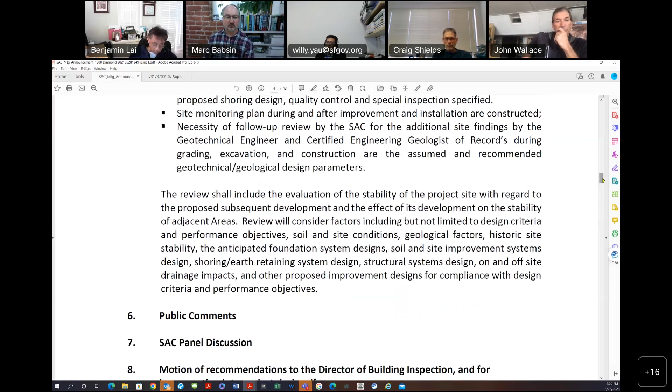In a sense, a site monitoring plan during and after improvements and installations are constructed—so I think there's still going to be a monitoring plan that needs details. But if there's no big concern and it's a run-of-the-mill type of monitoring plan, I think we can go without a second meeting. So that's what I see, but not necessarily the view of the SAC member.

Okay, and also the last one is the necessary follow-up of the SAC for additional site findings by geotechnics, geologists, regarding any additional investigation that needs to be provided for the assumed geotechnical, geological design parameters.

That's a big piece of it, hinging on whether that could be done without a second meeting, or whether it's actually necessary. On the other hand, by and large, are all the big concerns being satisfied?

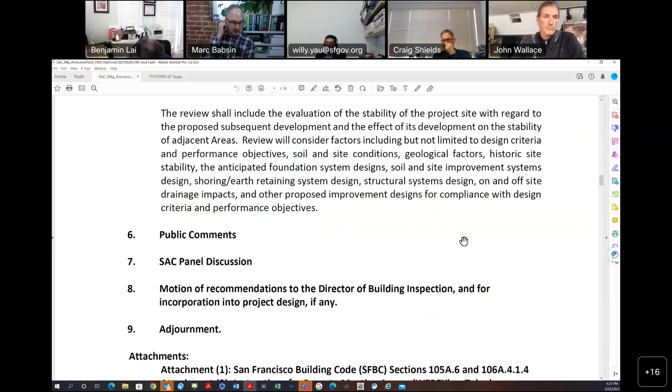Okay, so in conclusion, that's what I wanted to interject on this agenda. And then after the public meeting comments, the SAC can do a final panel discussion on what to do and whether all those items are satisfied. Thank you.

So, Willy, this is Richard.

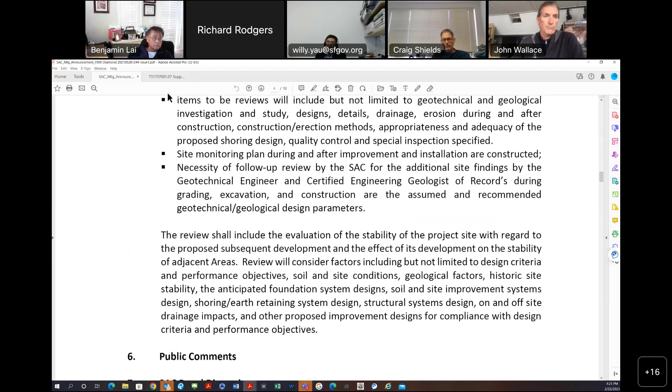We are committed to perform the monitoring and inspections required by code. That's a given, and I think Emerald Fund understands that, including the geological and geotechnical inspections and monitoring required for shoring and foundation. If there's anything in addition that the SAC committee is going to require, it behooves you to point that out to our client, Emerald Fund, Marc Babsin, and others. Let's have that up front, please.

We are not trying to cut corners here, or to circumvent the code. But right now, that's what we're committed to: the inspections required by code. So please let us know if there's anything in addition that you as the SAC committee will require.